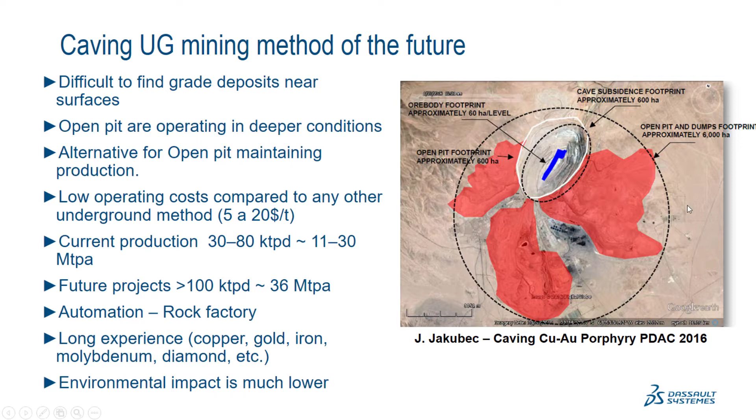I would like to take a few minutes to discuss with you on who we are and how we deliver our solution. We have the profound belief that the virtual world extends and improves the real world. In life, there is no rehearsal. In the virtual world, we can simulate and evaluate impacts before producing the product itself.

In our company, we are a purpose-driven company. We think of progress and innovation in terms of balance and impact. We have about 20,000 passionate people from 140 nationalities across the globe. We also have a large R&D team connected across 69 laboratories, and Dassault Systemes has a large PLM and 3D experience market share with more than 270,000 customers in 11 industries worldwide.

We have a proven track record that we can make our purpose happen. Industry will not be what it is today without Dassault Systemes' contribution. We have been the catalyst and enabler of the world's greatest industrial transformations. Every decade, we have helped manufacturers disrupt how products are designed and made.

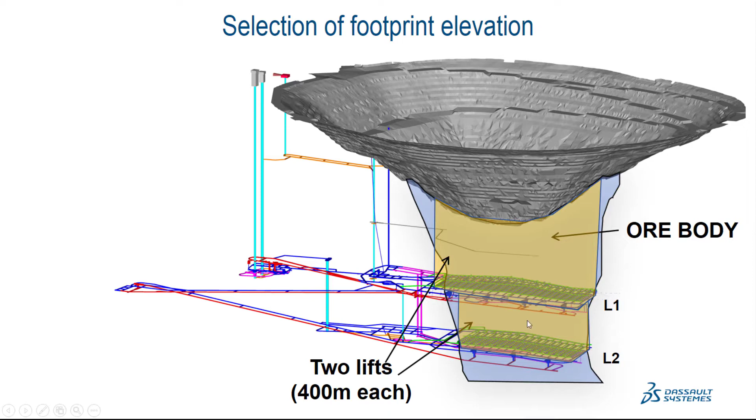Let's look in detail at the first step in any caving evaluation—specifically, where we take a strategic decision to evaluate where the optimum location for a footprint will be calculated. We can also evaluate different options, like dividing the structure into 2 lifts or 1 lift, all supported by economic calculations and evaluation done directly in the block model using our caving solution called Footprint Finder.

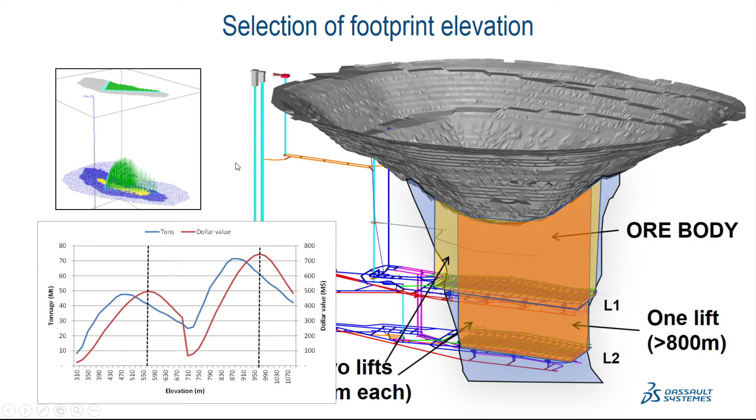For that, we'll see this video where you'll have the opportunity to see how the solution looks. So we run the options. In this case, you can run one scenario or even multiple scenarios by selecting inputs to read the area of evaluation from the block model, dilution,

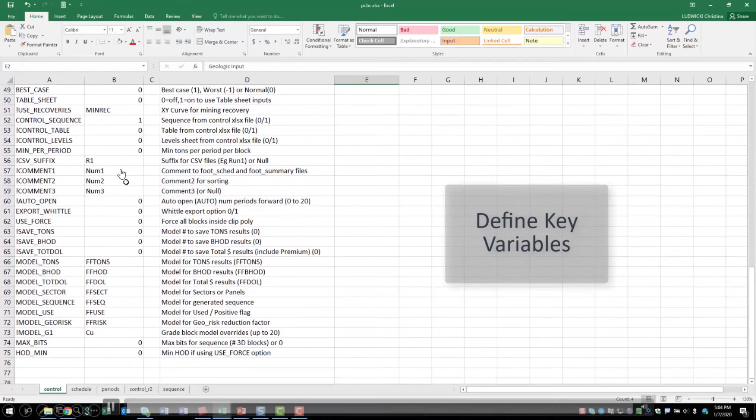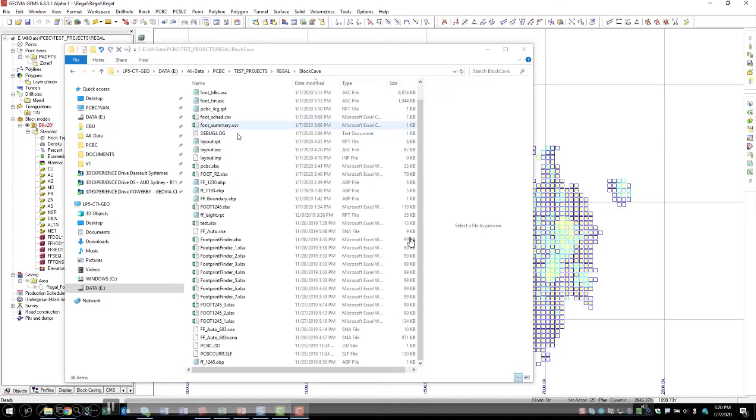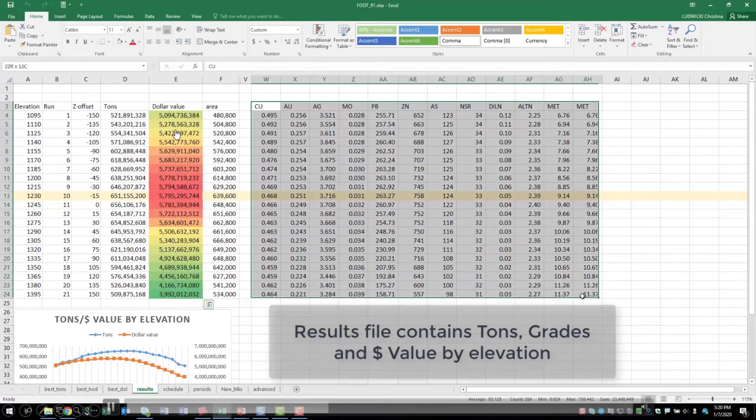some economic inputs, and also some specific parameters related to the block caving mine. This input can be read directly from Excel or from an advanced profile. As you can see here, this run shows the evaluation done for every level, where it's possible to see that every column for every block is being evaluated, simulating one draw point at a time. The color reflects the economic result. Additionally, a report is generated in Excel where you can easily see the elevation simulated with the tonnage and economic value calculated, along with additional information like grade.

With that, you can easily select the best option to do further, more detailed analysis—for example, limiting a footprint that is closer to the real condition.

So what we're going to do in this case is limit the footprint and run again on Footprint Finder, but this time not to select what is optimum. In this case, we're creating a simple production schedule by simply having different inputs, such as the tonnage profile or the production rate selected, and the sequence.

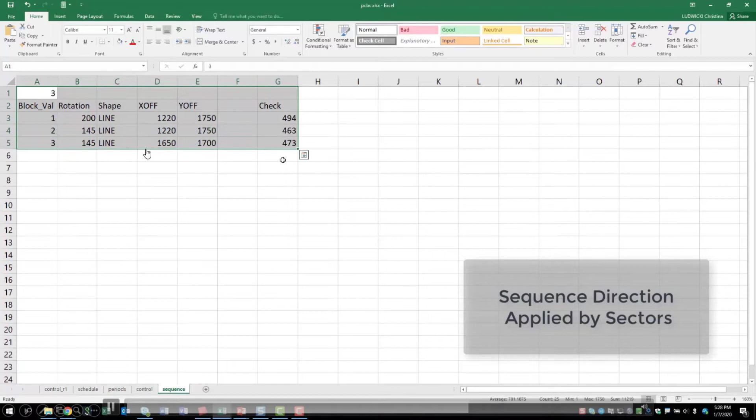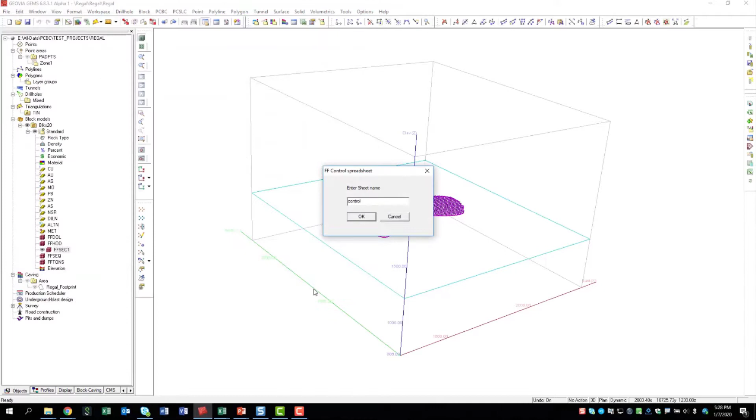In this case, the footprint is being divided into 3 sectors, so this production schedule will follow that. When you run it, you can see graphically how the sequence is applied, and also the height of the column will be simulated during the extraction.

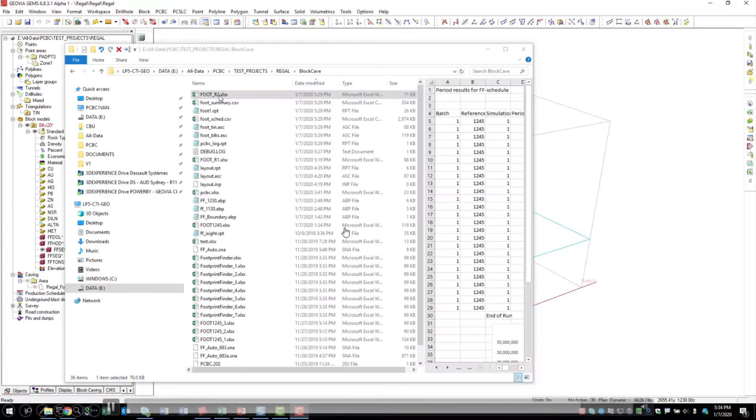As you can see here, it's very easy and quick to do, so multiple analyses and multiple options can be evaluated. Also, the result is dumped into Excel, so you can easily see the production profile for different periods, with all the grades and details you'd expect to have.

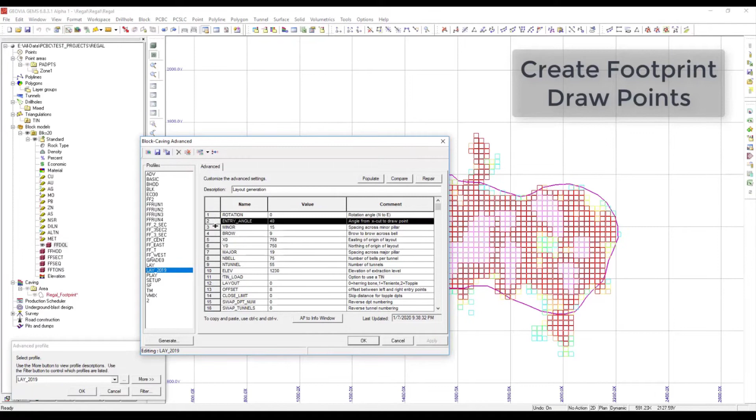The next business process is where we work in more detail, simulating material flow and dilution. In this video, you can see a second solution called PCBC, where we work in more detail, starting with the footprint selected previously. Here is where we can easily generate any layout to distribute draw points inside the selected footprint.

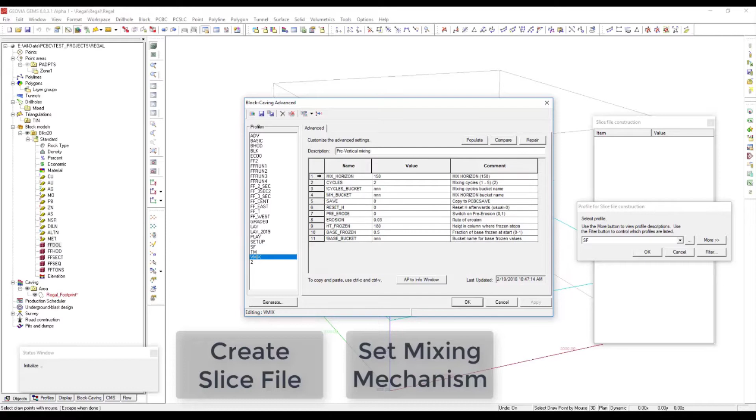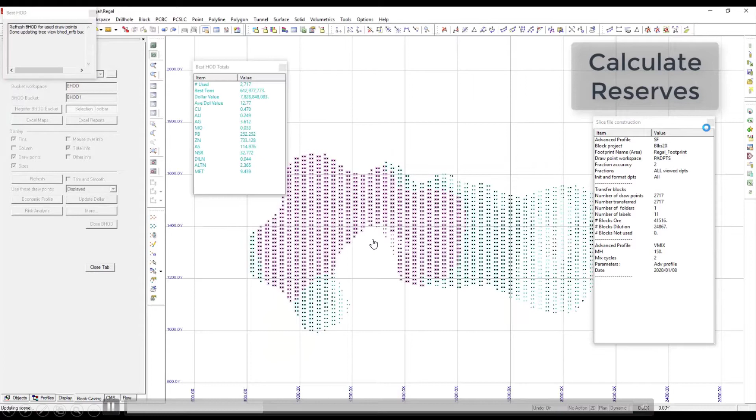With those draw points, we can now create what we call a slice file to put all the information from the block model into a draw column format. With that, we'll be able to use different mixing mechanisms to simulate the extraction, including dilution and how the material will be extracted in this case.

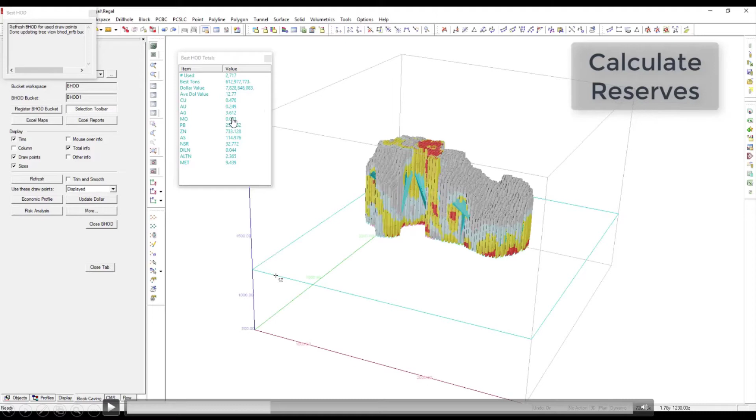What you're seeing now is an economic calculation where we can define the reserves of this deposit. As you can see, based on the distribution of the grade plus the economic information, we can easily calculate the tons and grade associated with declaring those reserves.

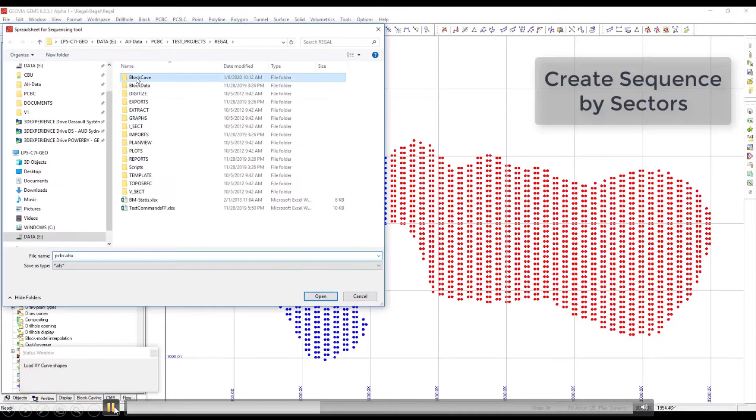With that, we can easily display any information associated, and then we can move into the definition of the production schedule. In this case, you can see how a production schedule will be generated using 2 sectors and 2 different front shapes.

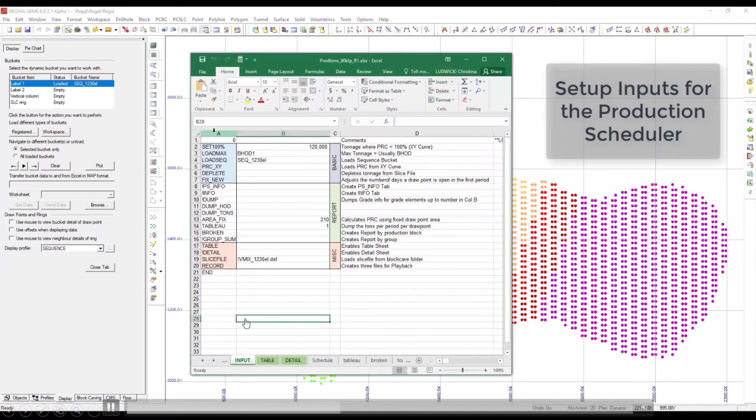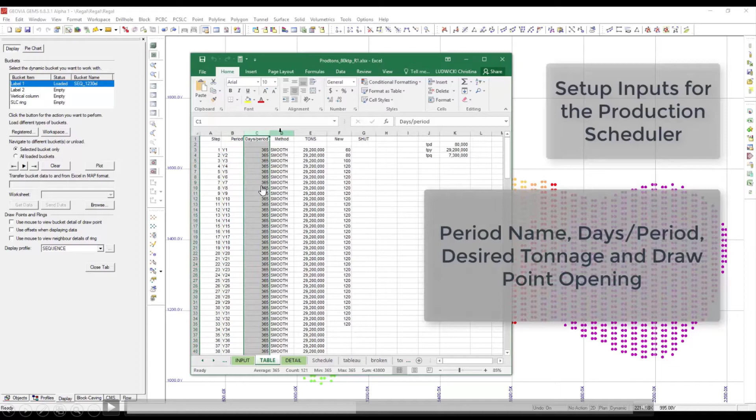Also, more detailed inputs can be added in Excel, like a specific production target. Depending on the level of detail you're working with, for strategic mine planning or tactical, it can be divided by year, month, or even weeks if you want.

With that, you have a lot of flexibility and multiple options to do this evaluation and create a production plan that can be used for different purposes, for example, for yearly forecast, quarterly forecast, or monthly forecast.

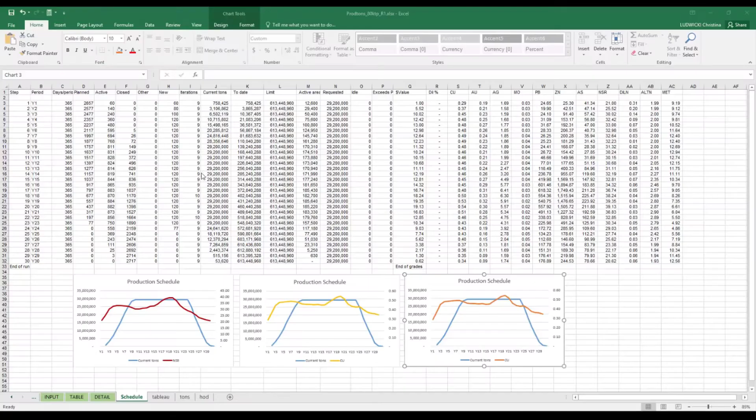In here, you can see as well in Excel all the results and detailed information, like tons simulated and the grade associated for the total of the run.

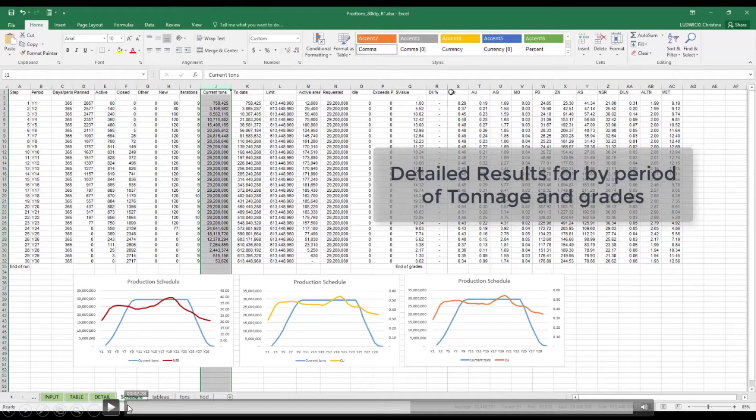Additional information can also be displayed even by draw point, where you can easily visualize what is happening in different formats per draw point per period. For example, in here you can see what is the height of extraction done at a certain period.

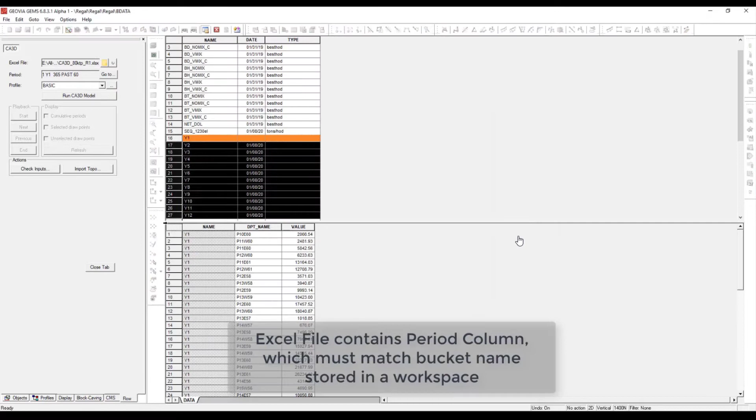Moving more into the detail of the analysis, we can use another type of mixing mechanism or mixing algorithm, like CA3D, or better say cellular automata. This is a numerical modeling that helps us have a better level of resolution of the simulation of the mixing that we're doing. In this case, basically, you run directly in the block model, and all the extraction is simulated.

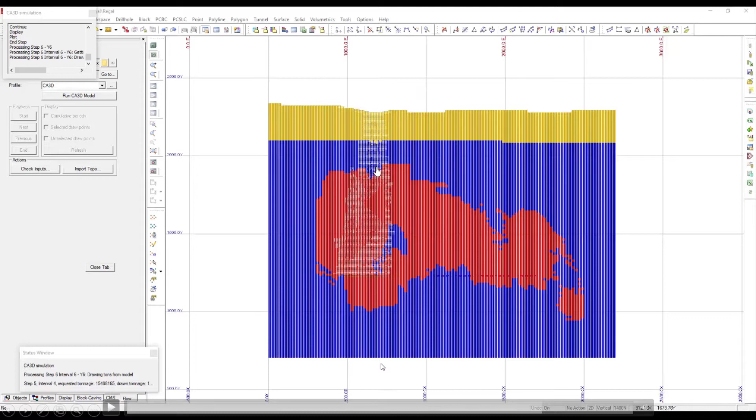What you are seeing here are different rock domains with different physical properties, and those properties will be used during the simulation to see, for example, if this material is expected to be finer than the rest, it is going to be percolating and moving faster than the other.

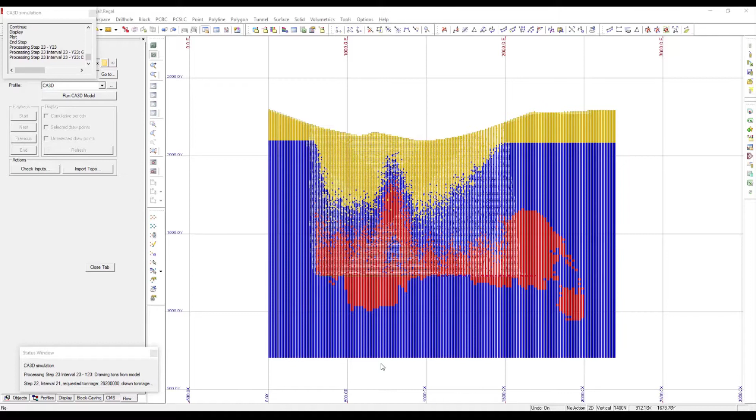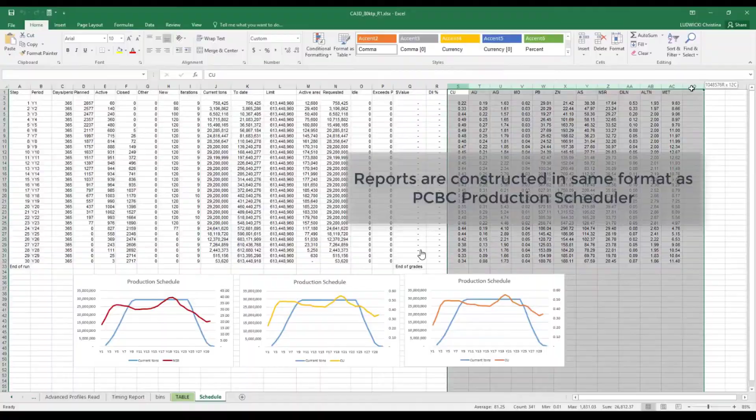So in this vertical section, you can see how the extraction is simulated, how the material is being mixed and extracted, and in the end, you will see the result dumped into Excel in a similar format as you saw before. With that, you can do not only a visual analysis of the run, but also a quantitative analysis, and then you can see all the details of the run.

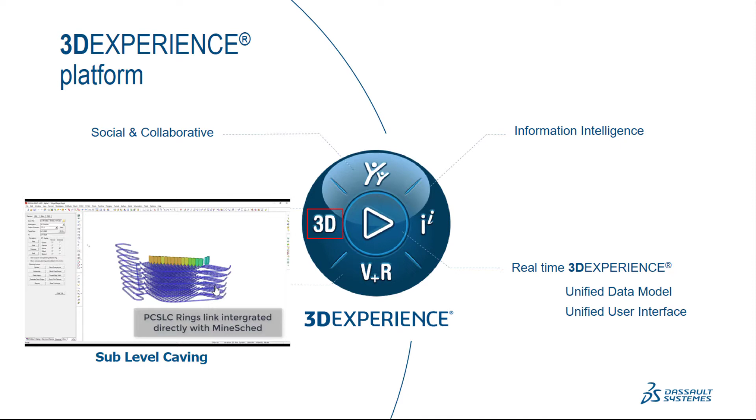The previous example was done for a block caving project, but our solution also includes sublevel caving as an option. In this video, you can see how a sublevel caving was previously designed and scheduled according to the rules of the sequence and the combination of the extraction to get a production plan.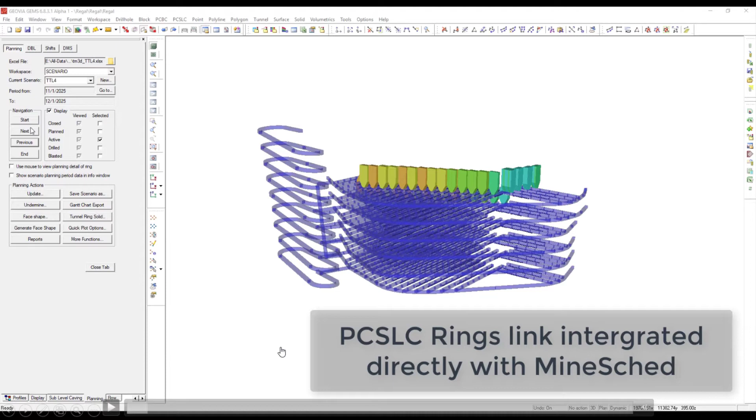Also, this information can be linked with the development to import all the information created in PCSLC by ring and generate all the data and design in MineSched.

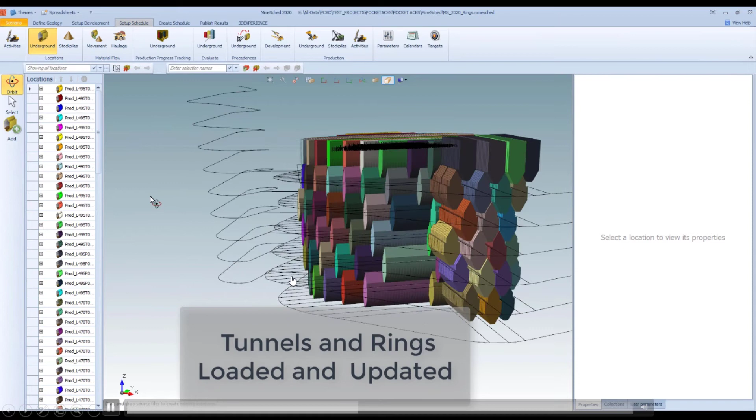With that, we can combine development and production, not only visualize them together but also prepare the development plan to support the production we wanted to get from those rings. So in here, you can see the same sequence simulated in PCSLC, combining development and production.

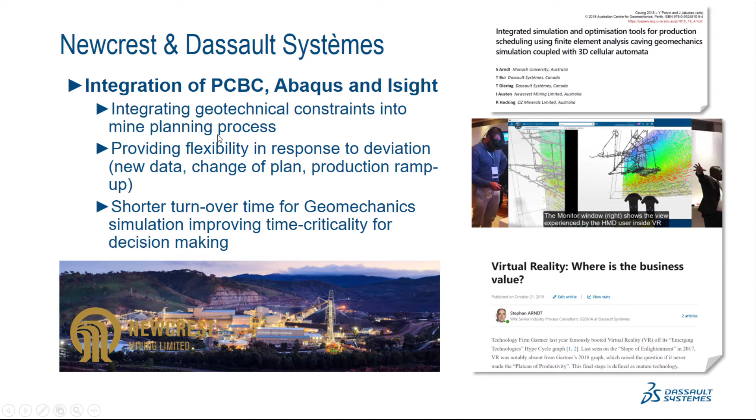The next item that I want to mention today is how we're going to be incorporating geomechanics. For that, I'm going to use the example and the development done in combination with Newcrest, where we basically integrate geotechnical constraints into the mine planning process.

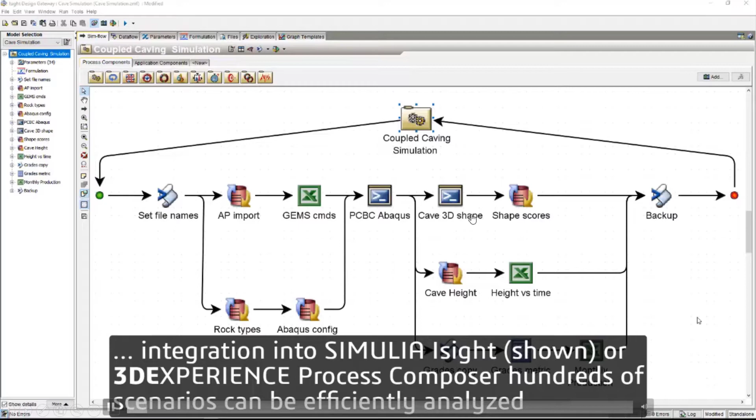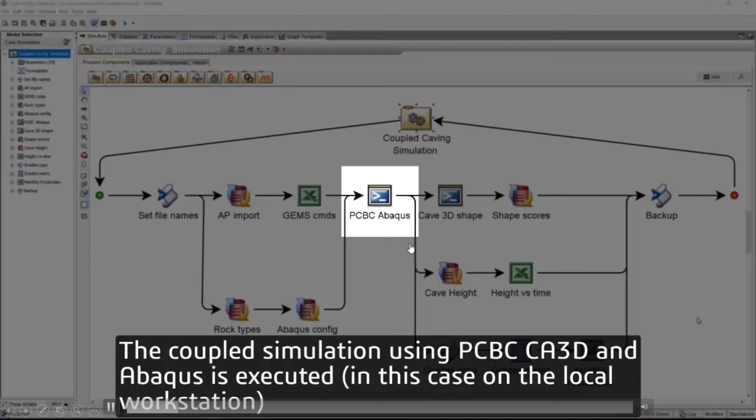This was done also using our solution combined with Isight or Process Composer, where basically we combine different processes in a workflow to connect what you can typically do in PCBC and the estimation of the shape for the cave back during the run.

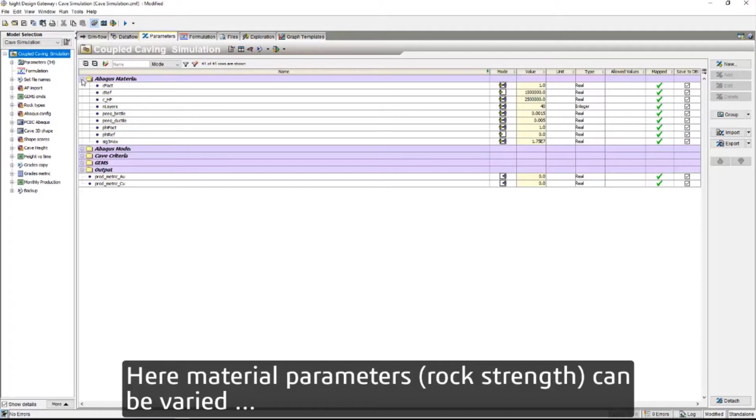It means for every period, PCBC will be capable of simulating the extraction done in the block model. Then, by the end of the period, that information will be sent to Abaqus. And in Abaqus, due to the redistribution of the stresses, the next cave backs will be estimated.

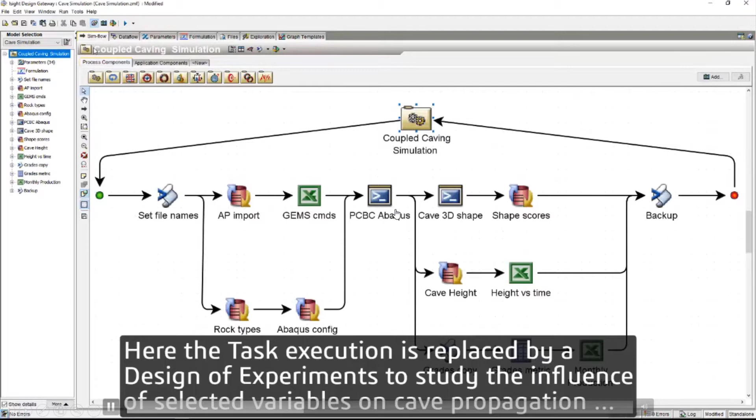With that, that information is sent back to PCBC, and PCBC will run the next period. As I said before, all this is done and combined using Isight, where we can see all the process and simulate different options and different scenarios easily to get the result that we want.

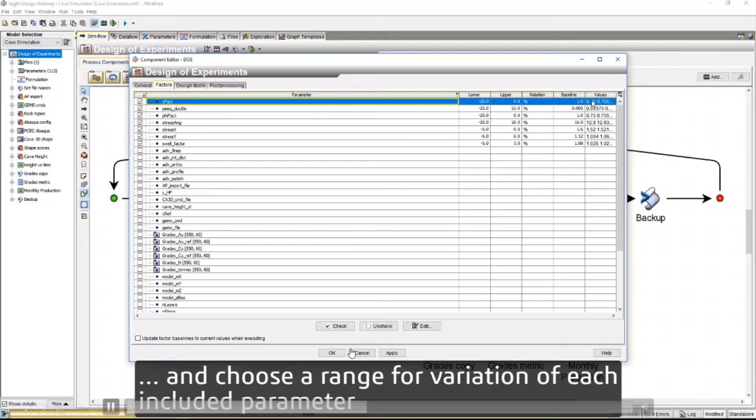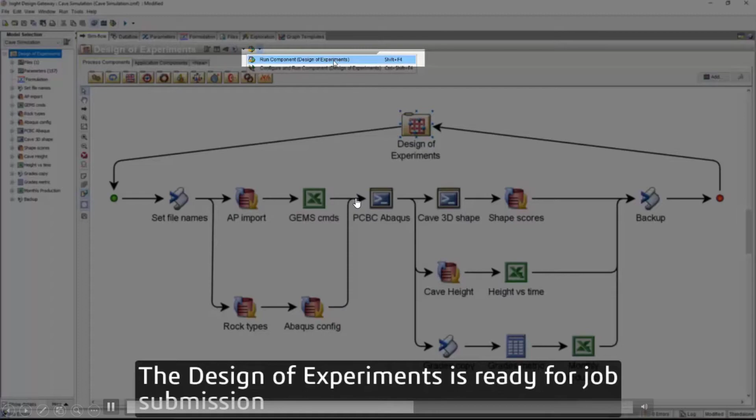Now you're going to be seeing the execution of this solution by basically running the process from iSight. iSight executes internally PCBC and runs the production schedule that you are evaluating.

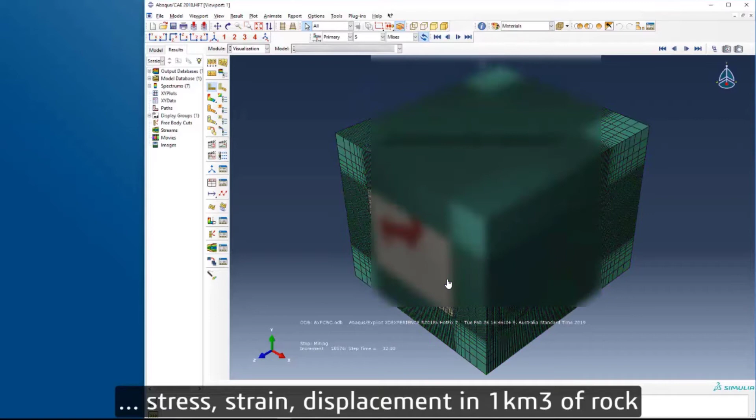In this case, we're using cellular automaton as a mixing model, and that will provide the information and link the data with Abaqus. And in Abaqus, you will see how the simulation is done, how the stress analysis is simulated according to the sequence used, the extraction done, and all the inputs that we typically use in a production schedule.

Most importantly, getting inputs of how the cave back is growing and how the vertical displacement is calculated to, for example, visualize what the principal stresses are and how you're going to be connected to the surface and or breaking through the surface.

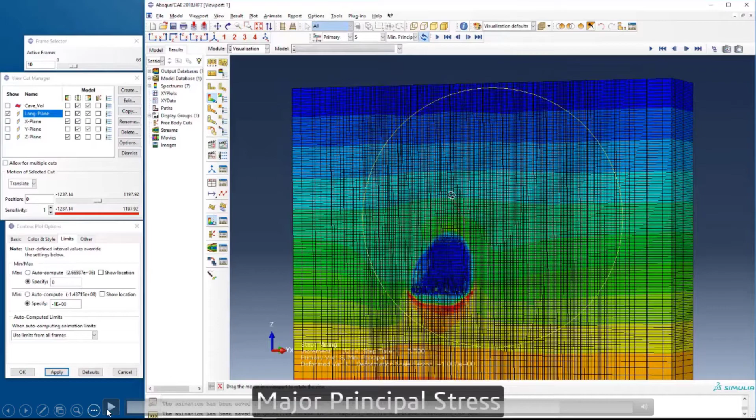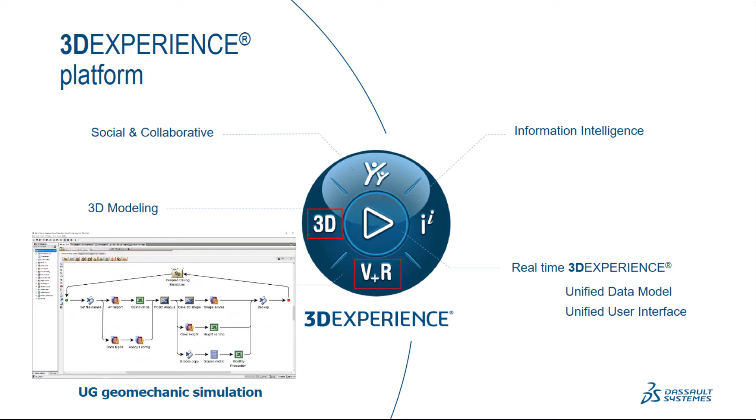You can see different concentrations of stresses, and it's very interesting how the combination of lift 1 and lift 2 is done based on the sequence that you are trying to evaluate. So this is finally where we were dreaming before, connecting mine planning tools with a geotechnical assessment all at the same time, all done period by period.

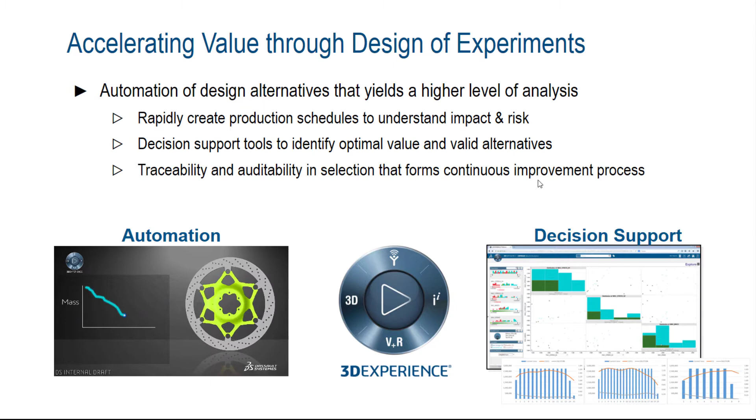Now I'd like to take a few minutes to talk about scenario analysis, because this is something we were never capable of doing before without the tools inside the 3D Experience platform. For that, we'll use Process Composer, or iSight, to generate multiple production schedules by changing inputs and even analyzing their optimum combination to find new options, not only the typical approach we use to take that decision.

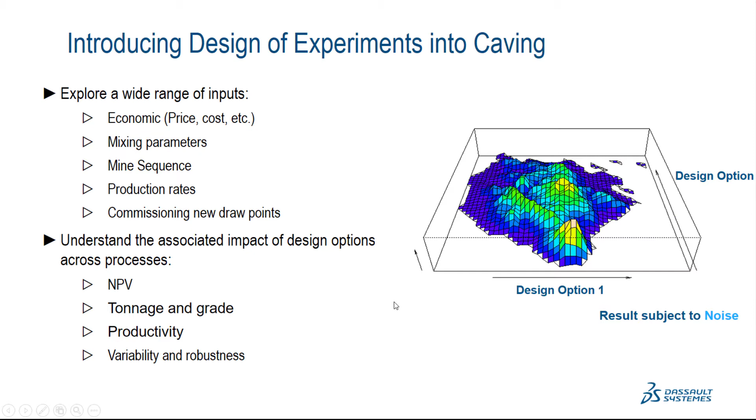For any caving project, we have a multiple range of inputs and parameters like economic, mixing, sequence that we'd like to test, production rates, commissioning new draw points, and all these are very difficult to combine and simulate properly. Normally we just evaluate one or two options and then make a decision, and that decision will be translated into things like NPV, tonnage and grade profile. But we couldn't do a proper analysis in terms of variability or robustness.

As an example, I'd like to describe the same deposit we were showing you before, where we select one specific extraction level. For that, we did the calculation of the shut-off grade of $15 per ton, and with that we calculate the reserve. Those reserves were basically 988 million tons.

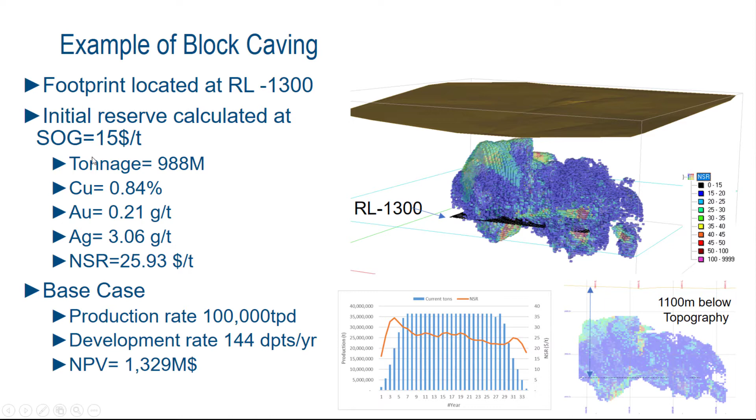However, what's happening if we want to challenge this or even go further and see what the opportunity would be to find a better solution, a better result, by letting iSight, in this case, simulate multiple options and alternatives by changing the shut-off grade, the production rate, and the development rate.

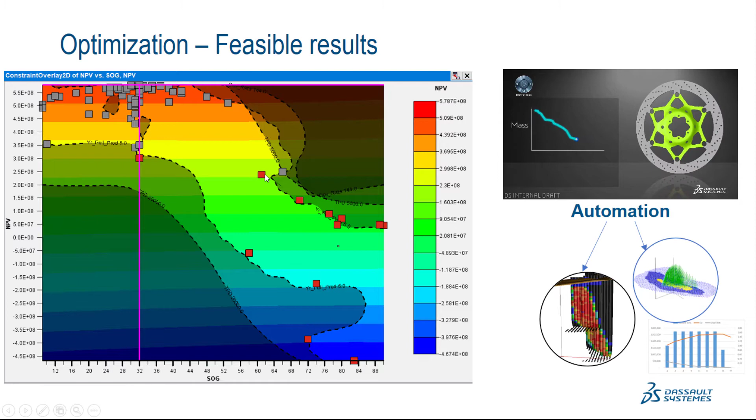As you can see in this graph, iSight is capable of generating different scenarios, and what you're seeing with this square with different colors and different areas are different scenarios simulated. For example, all those grays are valid scenarios and all those red ones are not valid. Why? Here we have different constraints and different options that limit the solution area.

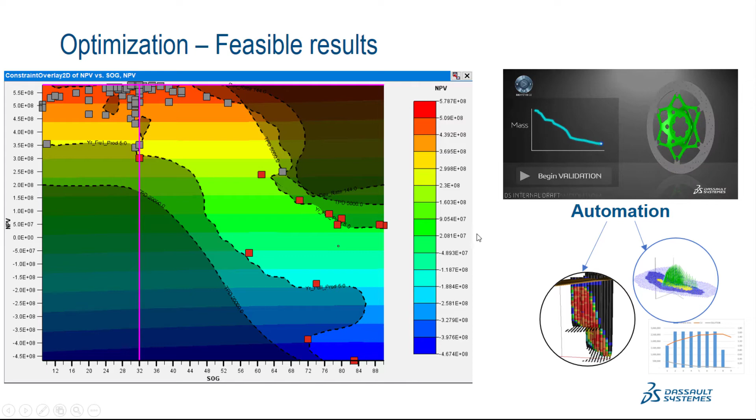With that, we're capable of simulating more than 100 scenarios, and we can highlight number 88 as the best case. For that, you can see the shut-off grade increased from $15 to $22 per ton. The development rate suggested was going higher, meaning developing this mine faster. And interestingly enough, the production rate was reduced, not to 100,000 tons per day, but to only 78,000 tons per day.

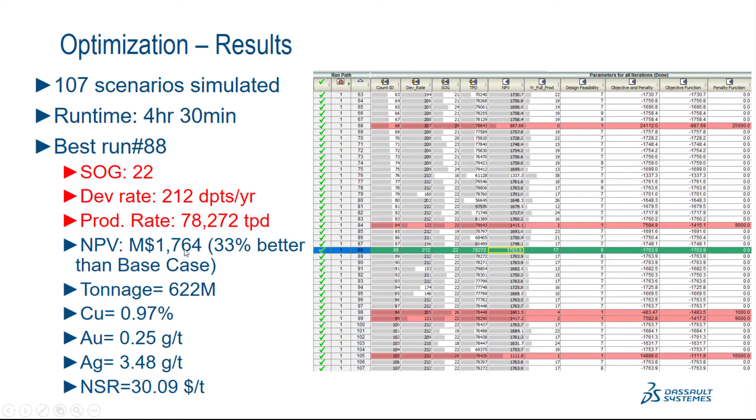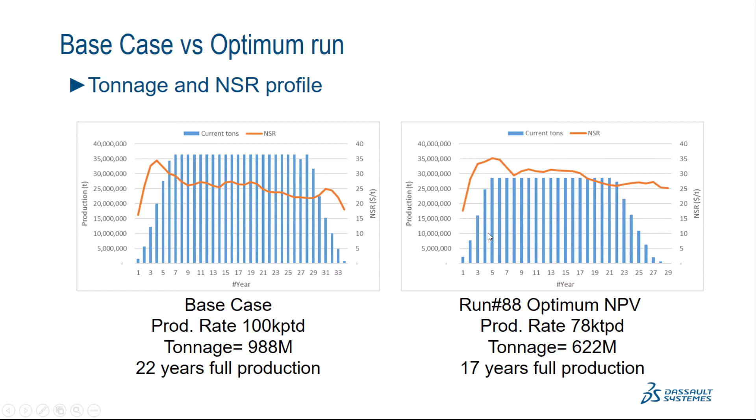With that, the NPV increased by 33%. And not only that, it's also providing a nice profile, similar to what we saw before, with all the level of detail and information that we needed. And this is translated into a smaller footprint, so we can basically have a different strategy.

And all that is not only reflected in one value, it's also described in a hill of value. And with that, we can see, in 3D shapes or in 2D view, based on the value of the NPV of those scenarios evaluated, where the best combination of those inputs is—for example, the shut-off grade and the production rate.

With that, we can challenge the optimization base case, located basically at this point, to go much higher—33% higher, as we calculated before.

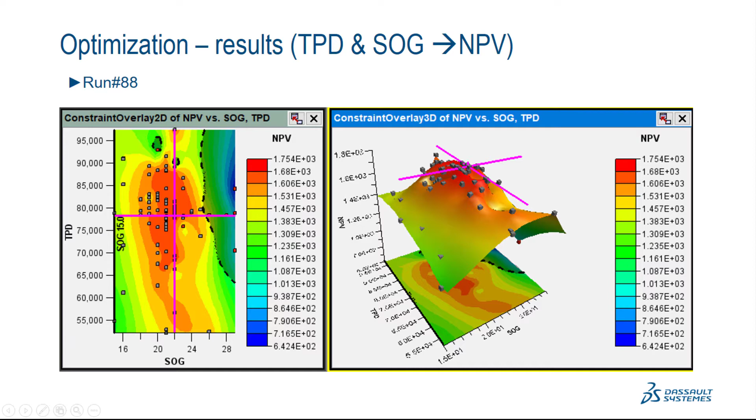Now it's time to see how we can bring data and results done in previous steps into the 3D Experience platform. This video will show the 3D Experience platform in action, by logging in and selecting the application you'd like to use. In this case, we go to the data analysis quadrant.

Then we can select what type of information we'd like to use, and here we have multiple options already developed. For example, bringing data from Footprint Finder, or data directly from the run that you do in PCBC. And that combined, for example, with production data, to compare how your forecast was versus actuals.

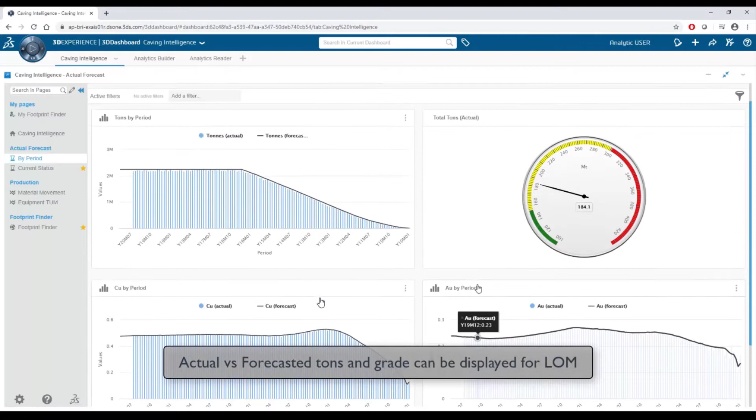In here, you can see any information that is being generated, for example in PCBC, like tonnage and grade, and compare those with the actual data collected from the mine. This provides a different level of visualization that can be shared with the rest of the team through the 3D experience.

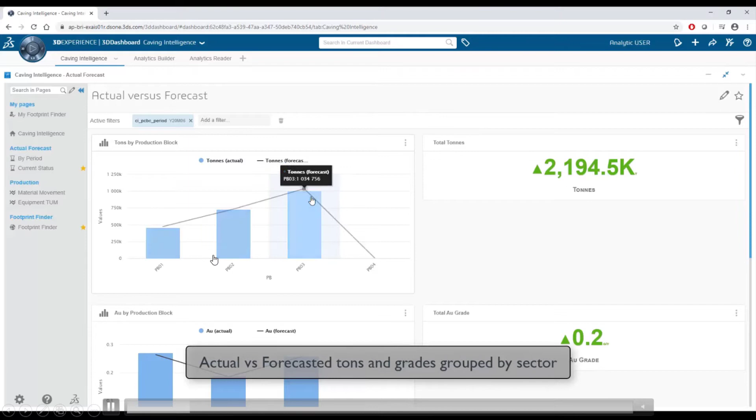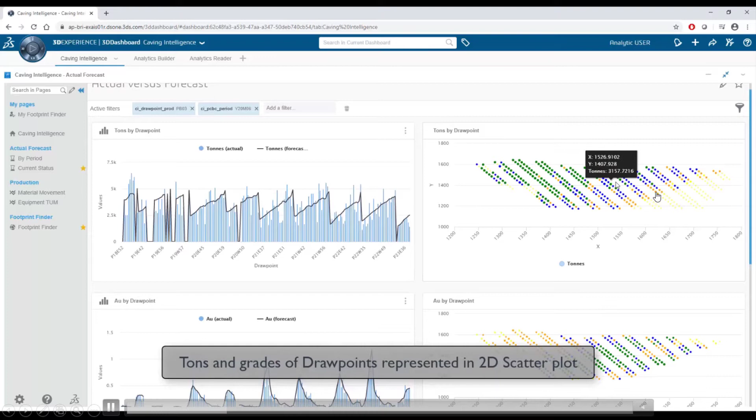This provides also a different level of detail depending on what you wanted to do, for example divided for different sectors, different production blocks, or even different mines. Additionally, you can visualize the information per draw point, like the tons extracted per draw point, and even the visualization of that data in 2D per draw point, so we can easily understand where the difference between the actuals and forecasts are.

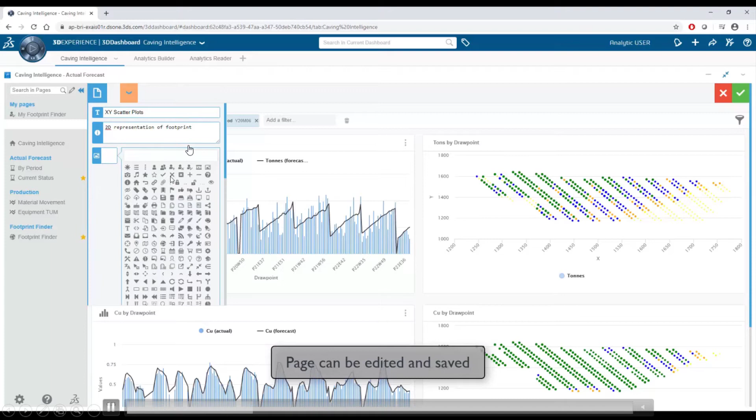Or in case you are analyzing different strategies or options, you can bring it in here and do that analysis. It's very easy to create new options of analysis and new alternatives to share this information with the rest of the team.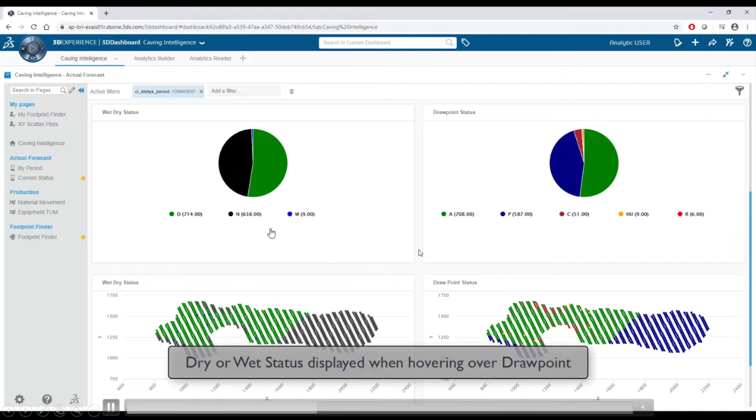Any data available in the run can be brought into the 3D Experience platform. For example, we can easily visualize the status of the draw point, in some cases highlighting specific cases like dry or wet for potential wet muck risk, or basically the condition of the draw point, if it's active, planned, permanently closed, or has problems like hang up.

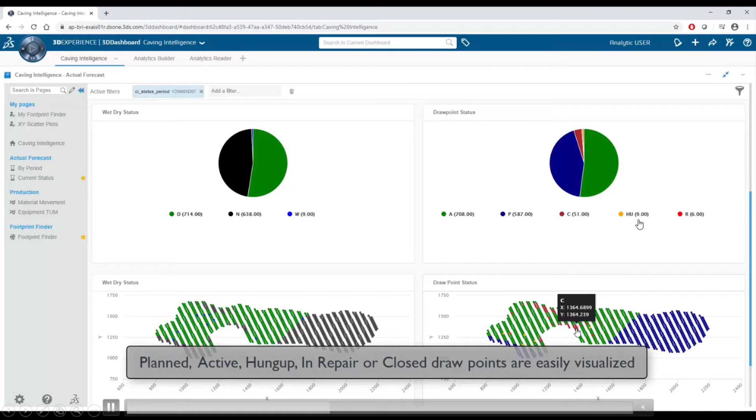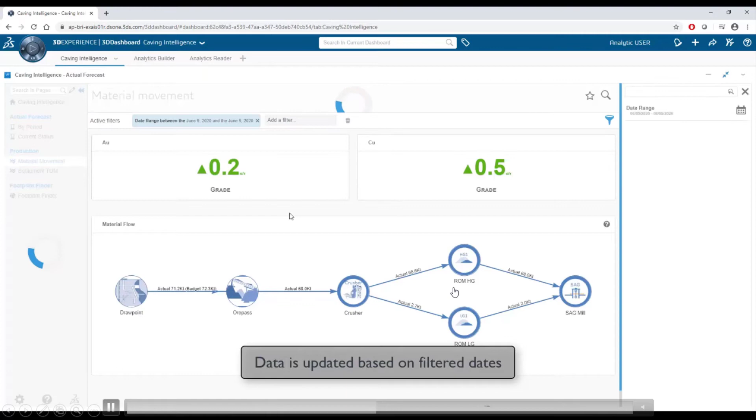Additionally, we can manage different levels of information. For example, not only per draw point, we can start bringing data from the mine, from ore passes, crusher, or even further in this line.

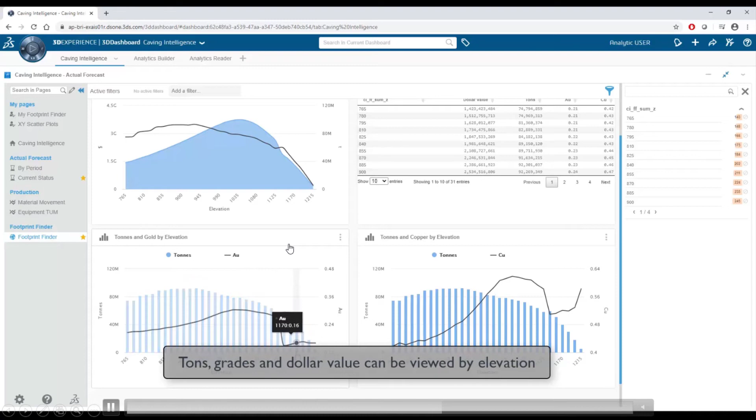Now, what you are seeing in here is an example of the data generated in Footprint Finder. Here is the typical evaluation that we normally do just in Excel, where you can see for different elevations what is the tons and dollar value calculated, and also the grade for gold and copper. That means the data that you normally see only in Excel can be brought into the 3D Experience platform using the Caving Intelligence app and visualized in different formats.

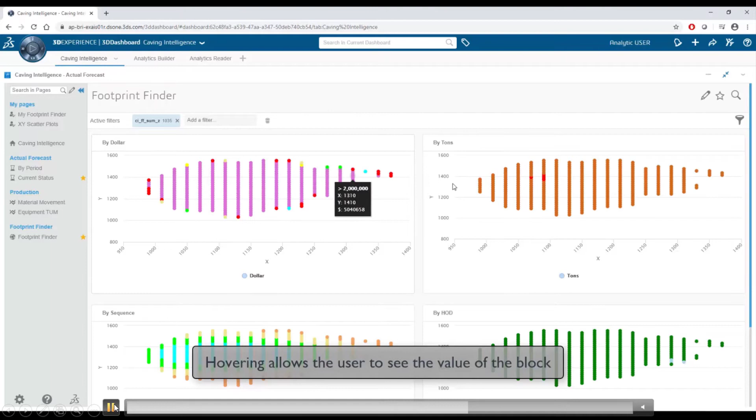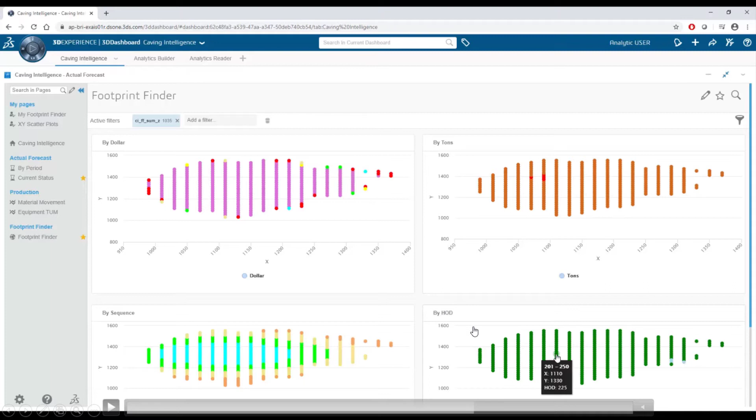To finalize this part of the presentation, here is an example we were evaluating with one specific elevation with different colors, showing the dollar value, the tons extracted, the height of draw calculated, or the sequence used in that case.

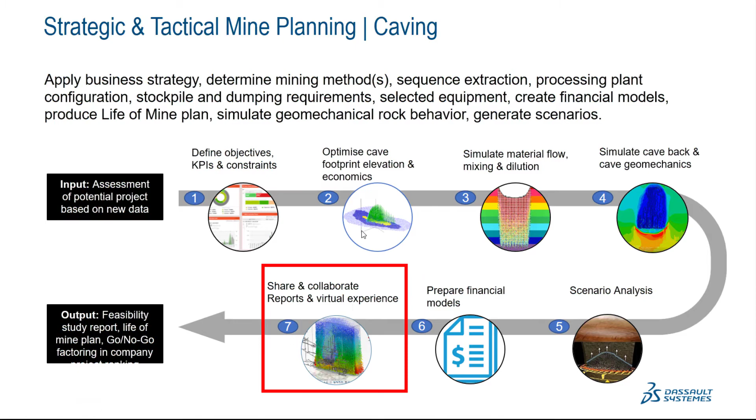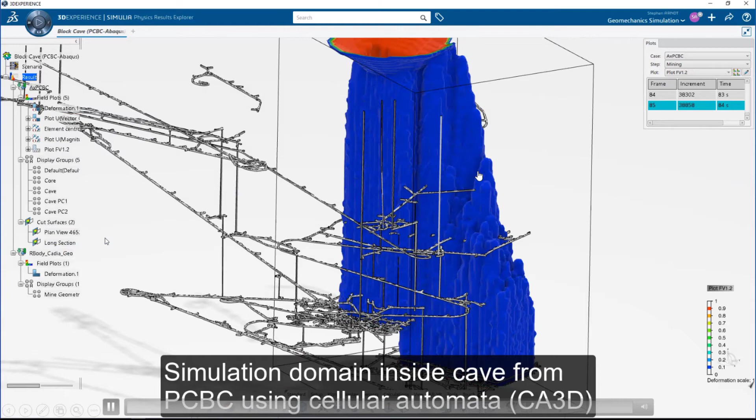We're going to be moving to the last part of the presentation in terms of how we're going to be sharing and collaborating inside the 3D Experience. For that, I'll play this video, which is also the data you saw before when we were doing the geotechnical analysis using Abaqus. So in here you can see, first of all, the design of the mine in 3D, and also the analysis of the projection of the cave back shapes.

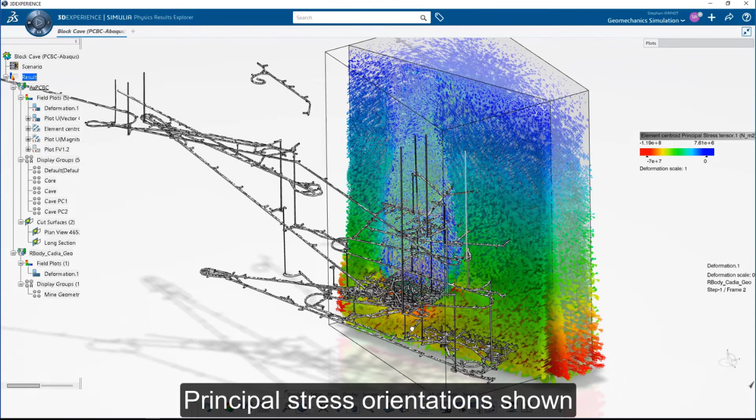So you can animate it in different periods, you can highlight different information, or you can see the result of the analysis in terms of, for example, stresses or stress orientation, or any data that you would like to see in this format. That's another way, another option to use the 3D Experience platform to visualize the data and also analyze and share the information that you are preparing.

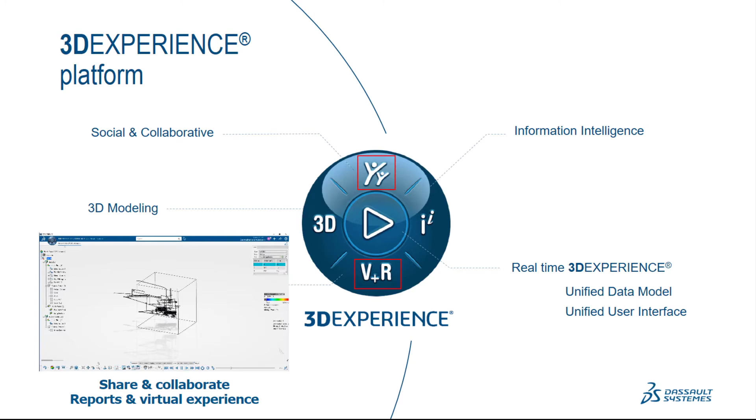With that, I would like to thank you for your participation today, and I'm open for questions.

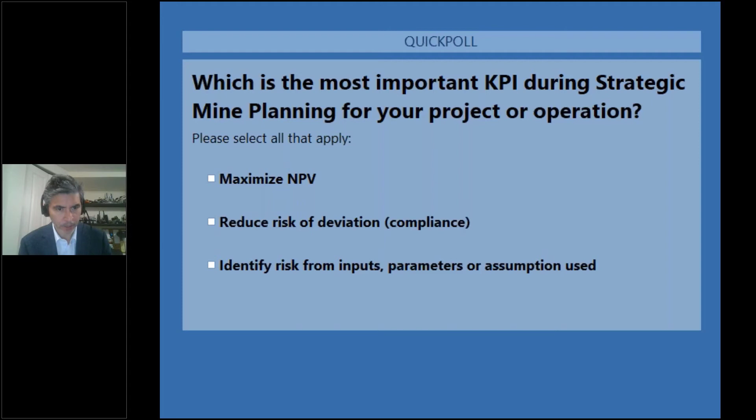In part of the video you saw a couple minutes ago, I was highlighting the power of doing multiple iterations, evaluating or simulating multiple scenarios. That's part of the new technology we're adding to the caving solution that some of you already know. It's quite interesting because it challenges the decision you're making. Some of the challenges come from iterating more than 100 or even 1,000 options. With that, you can even optimize a solution you couldn't see before, by combining those inputs in an optimum way.

In the result you saw, it was a real case, or rather a demo project, but based on a very realistic model. I was surprised that after running 100 iterations or simulating 100 scenarios, we learned so much. That's exactly what we're planning to do in this process: take advantage of multiple simulations and scenarios to discover new solutions, and from that, analyze the risk and robustness of the base case you're taking.

Thanks, Daniel. If you look at those poll answers, you'll see that 60% of the people have actually identified risk from inputs, parameters, or assumptions used as the most important KPI. So, as per what you've been doing, it seems to answer your question there.

That's great, because normally we tend to go for the value. That's why NPV is appealing and attractive, but sometimes it doesn't reflect exactly the value of the project or the value of the option you're taking. So measuring the risk is part of the multiple simulations you can do.

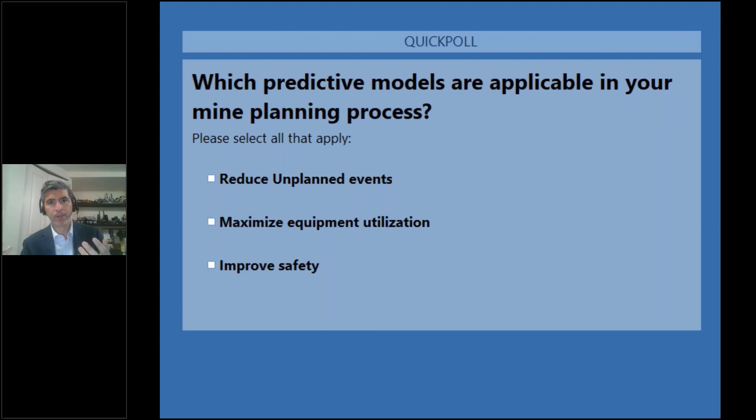Then it takes you through into the same solution using the same inputs, same information and software. You go from that to the detail of what is the design that you're going to be using, then what is the impact of the distribution of your tunnels, draw points, and then to the detail of the mine planning. It's all combined and it's all in a cycle.

What I mean by that is, for example, if you're running your life of mine plan, you divide that into a year, then start working more in detail in a monthly forecast. The monthly forecast is taken as a target for your daily operation. After the month is done, you reconcile the result, and then you know how many tons were extracted for every single draw point in that month. Then you can do a compliance analysis to see what is the deviation of your plan versus the actual, and what is the reason behind it.

After that, you can easily import the actual data and the conditions of the mine to update the forecast for the next month and so on. Then by the end of the year, you get the summary for the annual reserve, and you update the whole thing. So it's a cycle that is well connected. It's a compelling solution, and it's all based on the same solution.

And the best thing now is we are bringing that information again into the platform, as you saw in the video with the cave intelligence. So we hope to do more in the future, and that's part of the whole platform.